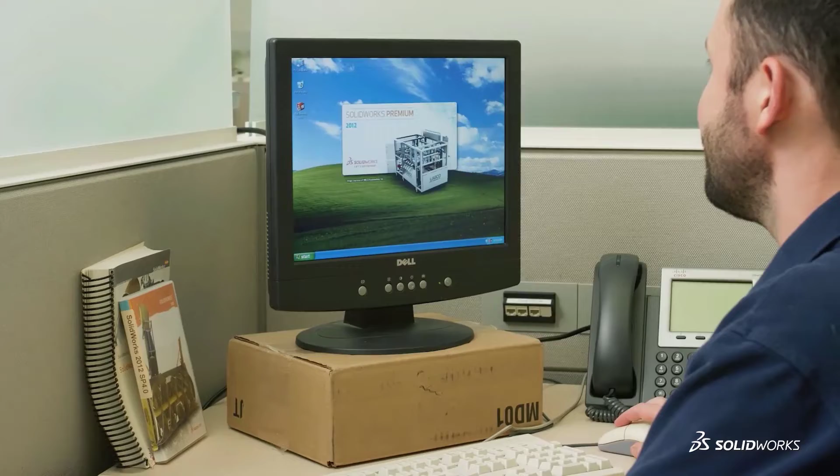So much has changed over the last 10 years, hasn't it? Over the last 10 years, what changes have you experienced? I bet the ways you connect to your job and accomplish your work are most certainly different.

Progress must be part of your purpose. To make great design successful, you must also master the business of product innovation. Where we used to think of CAD data as the main source of truth, actually product development information is all around us, in every conversation, idea, interaction.

Welcome to 3D Experience World 2021. As smoothly as your team works together, what about your extended value network? Let me invite William and Charles from Square aboard.

What made you pick 3D Experience platform? We really needed a mechanism to store and organize revision-controlled CAD data in the cloud. And so we looked to 3D Experience to do that.

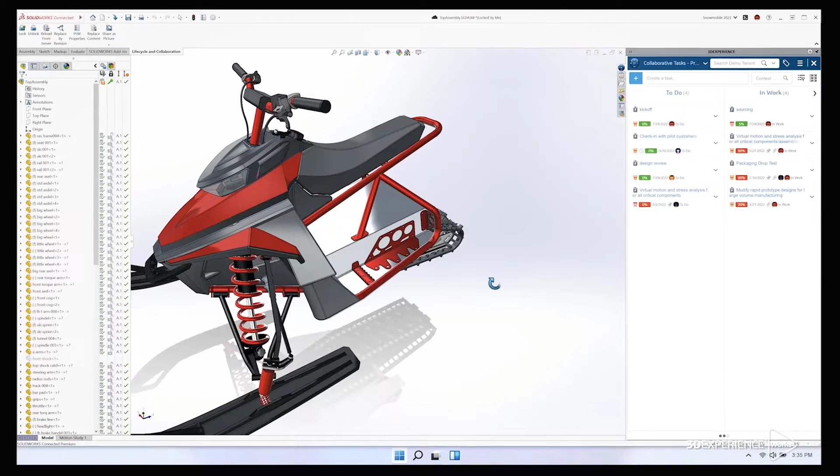For 2023, the SOLIDWORKS R&D team, as usual, has delivered an amazing lineup of enhancements to help you work smarter, faster, and together. Not just together as a team, but also connected to your data and your tools.

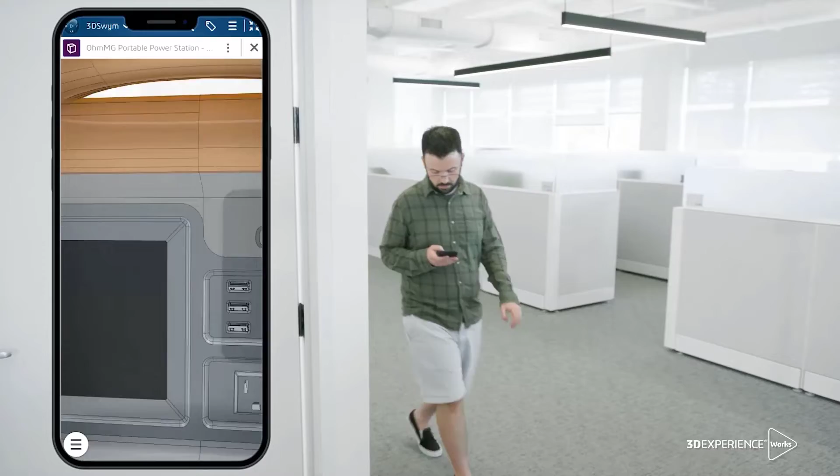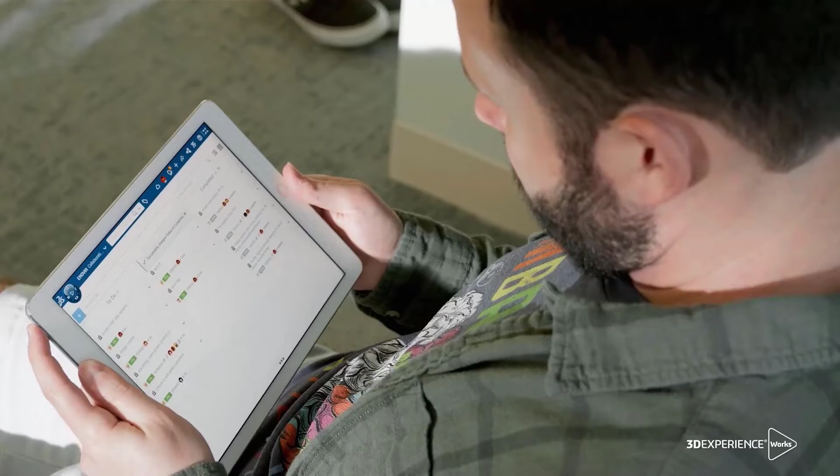In 2023, we will improve your productivity and optimize your CAD potential. But to truly accelerate your innovation, you need to make all product information available for your entire enterprise to access and act on real time throughout the day, wherever they are.

As you look to 2023, how will you continue to improve your productivity and expand creativity? How will you inspire those around you?

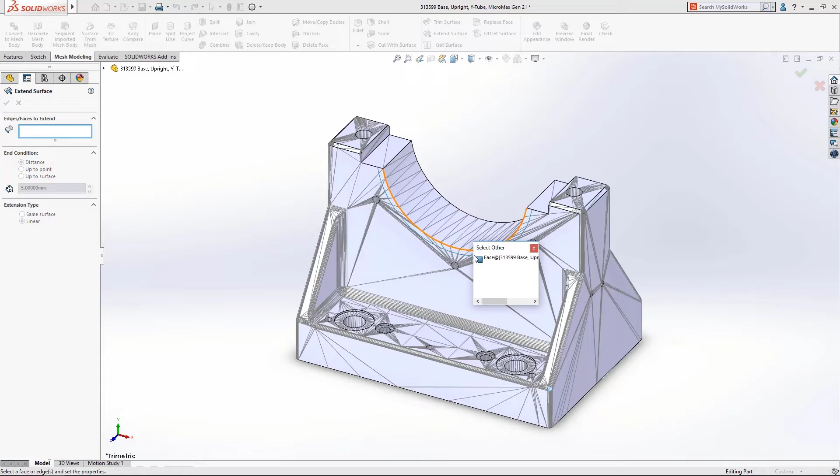SOLIDWORKS 2020 now supports more advanced editing tools, which will make it easy to increase the radius of this surface. We'll start by offsetting the mesh surface and extending the result. SOLIDWORKS 2020 now supports mutual trim operations, as well as knit surfaces, making this change a breeze.

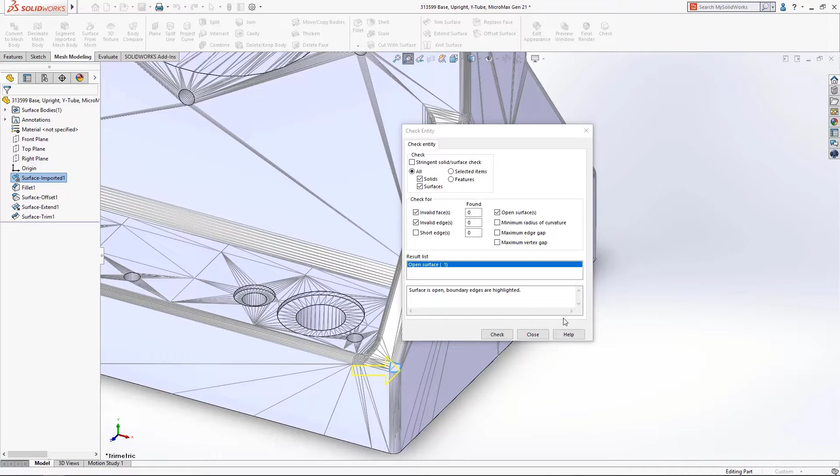It's not uncommon for STL files to be damaged. Running a quick geometry check shows that there's an open surface. With SOLIDWORKS 2020, you can now delete these holes by right-clicking and choosing Delete Hole from the context menu, or by simply selecting the edge and pressing Delete.

SOLIDWORKS 2019 introduced Delete Face. SOLIDWORKS 2020 expands the capability to support Delete and Fill, which makes removing these features on the part a trivial operation. SOLIDWORKS 2020 gives you powerful tools that makes editing mesh geometry familiar and easy.

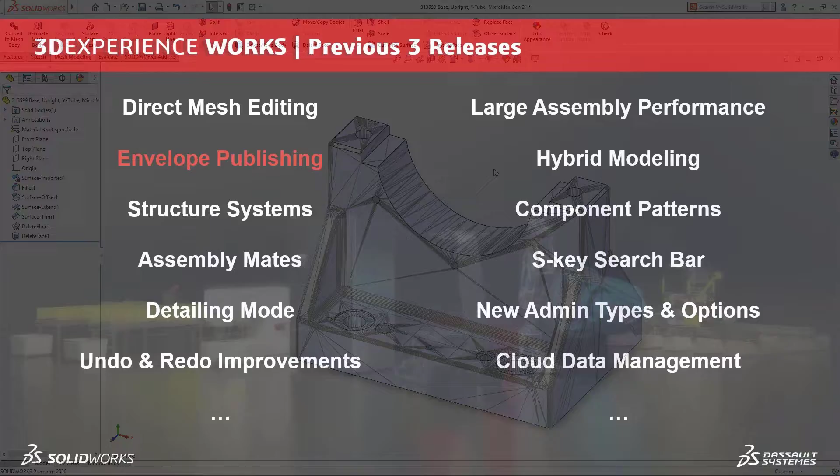Next, let's look at envelope publishing. Working on complex assemblies like the OMAX Micromax Waterjet with multiple systems and designers can be a challenge, especially when work needs to reference other subassemblies. Previous workflows would either have work done at the top-level assembly or by creating duplicate parts in subassemblies. These added significant time and could be difficult to manage.

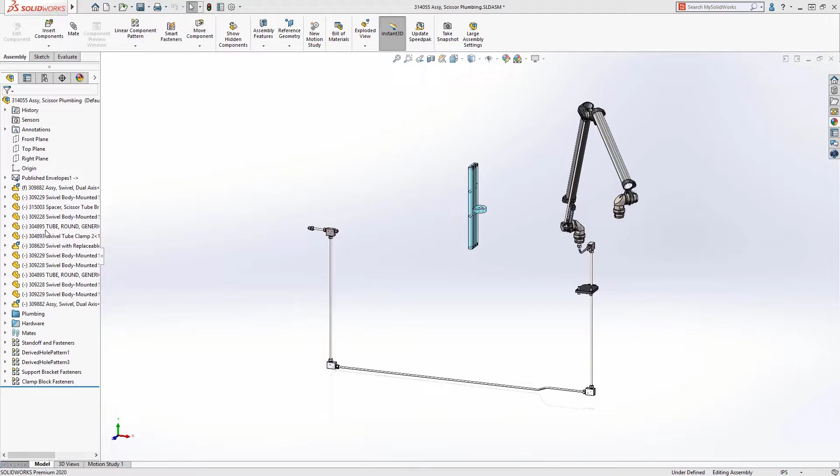Envelopes have long been a great tool for making reference components that do not affect calculations or bills of materials. With the new envelope publisher in SOLIDWORKS 2020, envelopes are no longer limited to components in the same assembly. Now, we can simply select the components needed for reference and a destination assembly.

Once the envelope is created, we can open this same destination assembly to complete the task. Now it is easy to finish all the plumbing design work in one place. We can add reference geometry or mate directly to the envelope components, ensuring the design will fit in the top-level assembly. Envelope Publisher makes it simple to work collaboratively in large assemblies and be assured design work will fit together seamlessly.

Next, let's look at a revolutionary way of weldment design: Structure Systems. Structure System was introduced in SOLIDWORKS 2019 and provides a more flexible method to create welded structures with or without the use of complex 3D sketches to define all the members.

Let's review some of the capabilities of Structure System and take a look at several of the enhancements for SOLIDWORKS 2020. In this example, the weldment will be defined with just a couple of sketches, an axis, and 4 planes.

Primary members can be created in a variety of ways, but now in SOLIDWORKS 2020, the point and length member definition has new options. Members can now be created between pairs of sketch points or chained together to create a series of members along a chain of points.

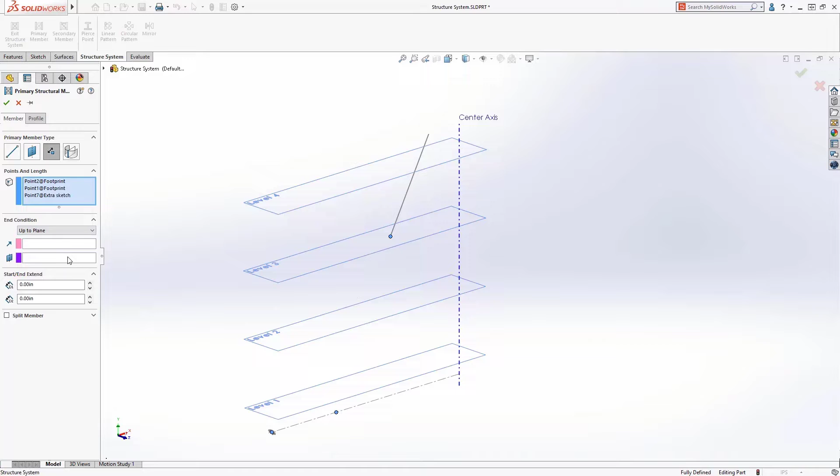The new Up to Point option allows you to create members that all converge at a single reference point. And the new Up to Plane option creates members that terminate at a selected plane. The member extrudes in the direction of the reference plane, or you can choose a sketch segment as the direction.

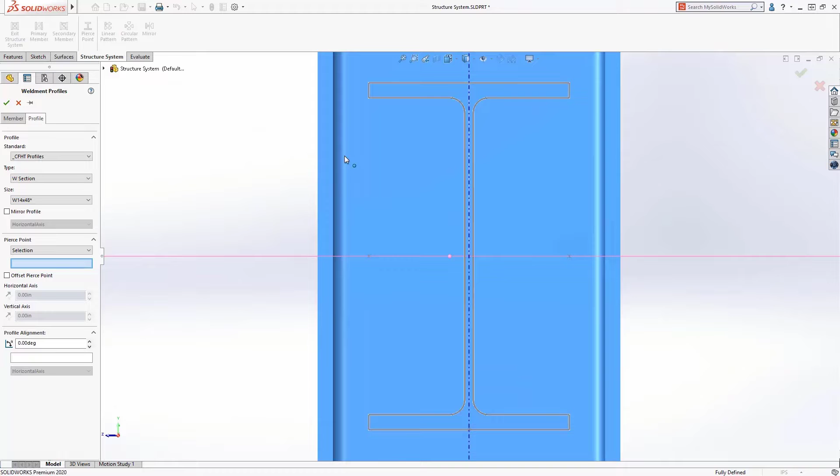As introduced in SOLIDWORKS 2019, secondary members can be added using support planes, and for these, a different weldment profile will be used. The top of these members needs to align with the selected planes, and to accomplish this, an alternate pierce point can be selected. Another secondary cross member can be added using the Between Points method, and will define this member to go between the corners.

In SOLIDWORKS 2020, primary and secondary members can now be split during creation. Splitting can be done using dimensions, instance count, or by selecting a reference such as a face, plane, or structural member. And for this member, we'll rotate the profile by 90 degrees.

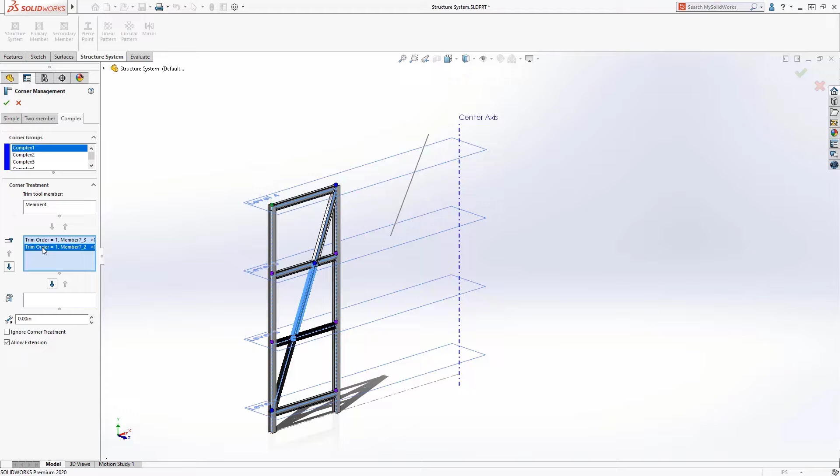When you're finished defining this structure system, the corner management tool kicks in and allows you to define the corner trims. For the simple corners, we'll define a planar trim with full contact to the intersecting member. For the complex corners, SOLIDWORKS does a fantastic job of determining the trim tool as well as the trim order for the intersecting members. Hiding the vertical member, you can see what a great job SOLIDWORKS did on the corner management.

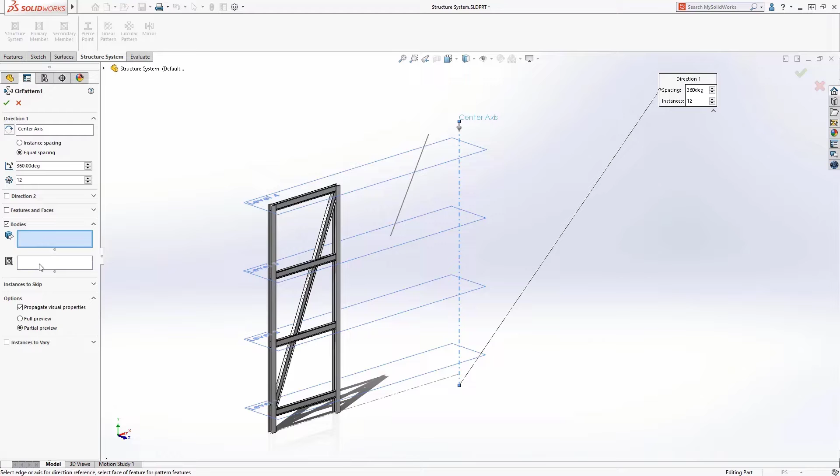To create the circular structure shown in the beginning of this demonstration, we need to pattern this structure system. Previously, bodies could be patterned to achieve this, but now in SOLIDWORKS 2020, you can create linear and circular patterns or mirror the entire structure system. By patterning the structure system, you are maintaining the intelligence of each of the members, and additional structure systems can be added referencing the patterned members.

In this example, we'll add a new structure system to define the perimeter members. These are added using the support plane method between the original structure system and the pattern members, and the pierce point will be defined to align to the planes.

Upon exit of this structure system, the corner management tool determines the corners between the new members and the first structure system and its pattern members, and determines the proper trim tool member and trim order. This perimeter structure can also be patterned to complete the design.

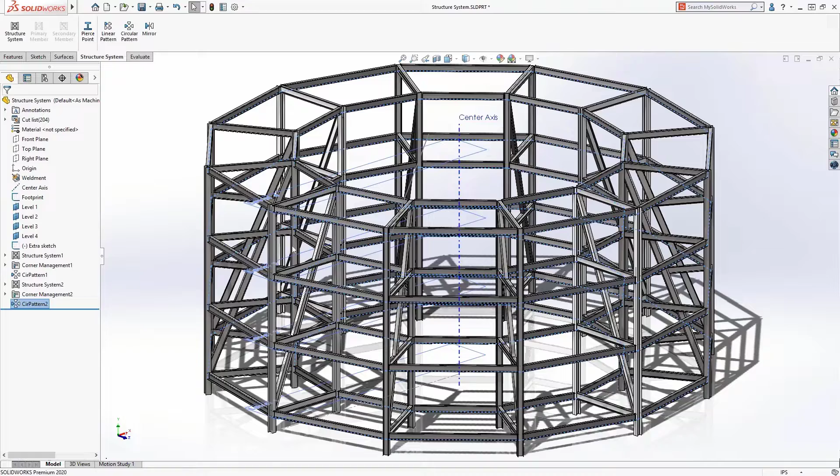The structure system feature, introduced in SOLIDWORKS 2019 and enhanced in 2020, provides an advanced weldment environment that lets you create and modify structural members of different profiles in a single feature with flexible corner management and trimming.

Fourth on our list is Enhancements to Assembly Mates. The Quick Mates toolbar, introduced in SOLIDWORKS 2014, provides a means to rapidly assemble components directly from the graphics area. SOLIDWORKS 2020 extends this popular tool by adding additional commonly used mates.

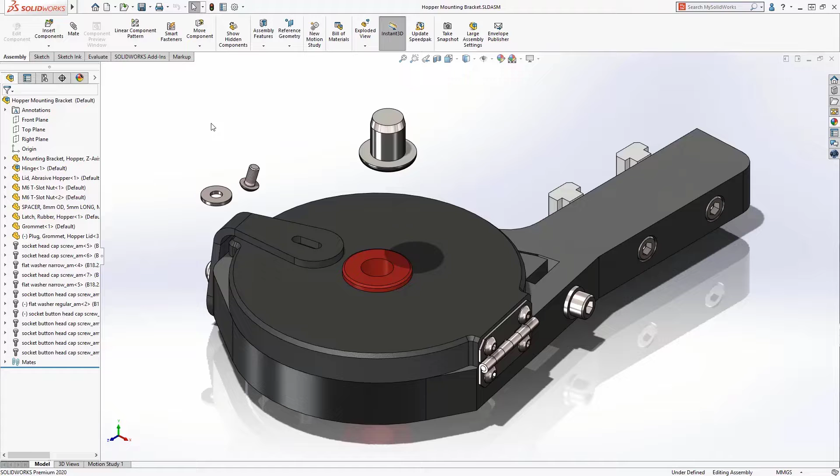Let's take a look. When mating the washer to the slot, the Quick Mates toolbar now includes the slot mate and provides options for choosing its constraint. For this case, we'll center it in the slot.

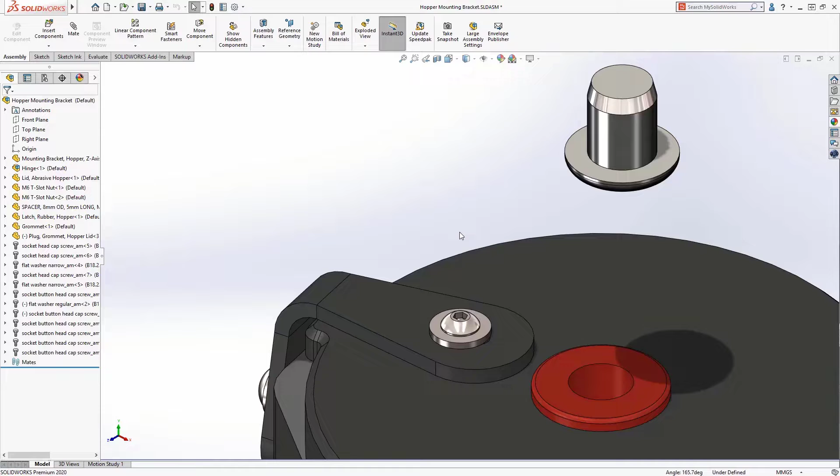The screw needs to be mated to the washer, and we've long had the ability to do this with the Profile Center Mate from the Quick Mates toolbar. But there was no way to flip the mate alignment without editing the mate after creating it. Now, in SOLIDWORKS 2020, a new Flip Alignment button pops up, allowing you to flip the mate on creation.

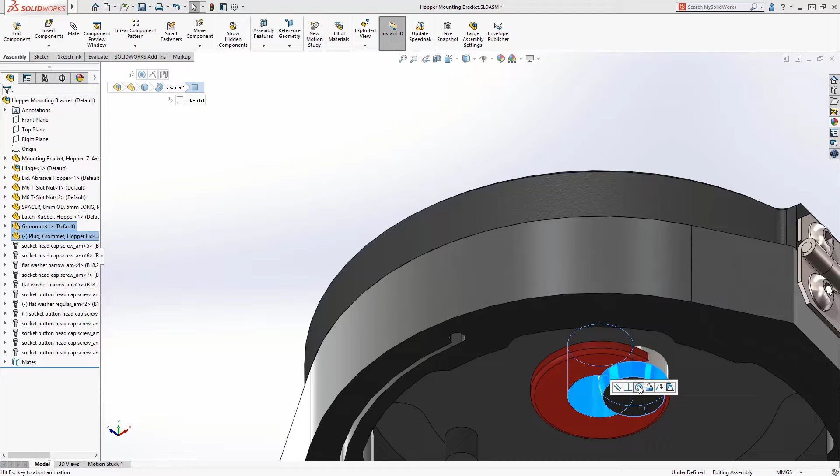Just as with the slot mate, the constraint options are available for the width mate to establish its position. Previously, there was no way to flip the alignment of a width mate. Users had to suppress the mate, rotate the part, and then unsuppress the mate. The new Flip Alignment button pops up, allowing alignment changes on the fly.

In addition, when editing a width mate, the option to flip mate alignment is now available on the right mouse menu as well as in the Property Manager. Limit mates have also been added to the Quick Mates toolbar. Both the limit distance and limit angle mates are now available to quickly position components in the assembly. The angle, maximum, and minimum values can be entered immediately to keep your focus directly on the screen.

With the new mate types available on the ever-popular Quick Mates toolbar, SOLIDWORKS 2020 continues to provide users with tools to rapidly assemble components. How about this one? A big favorite of many designers, Detailing Mode.

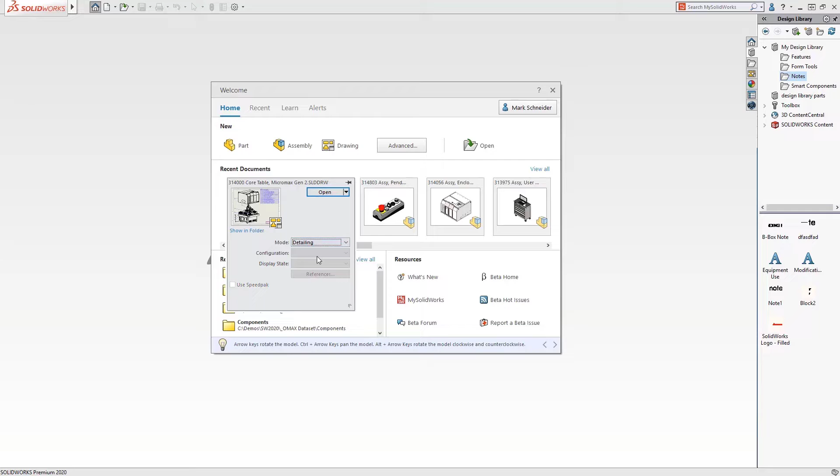Performance is always a major focus for the SOLIDWORKS development team, and this year is no different. With Detailing Mode in SOLIDWORKS 2020, you can now open massive drawings in seconds, regardless of their size and complexity. The model does not get loaded, but the drawing views are intact, so there's no loss of detail.

Detailing Mode is perfect for opening drawings for minor edits or design reviews. Individual sheets load in an instant, and the drawing can also be printed. But it doesn't stop there. Some editing capabilities are available as well, such as making changes to annotations or dimensions.

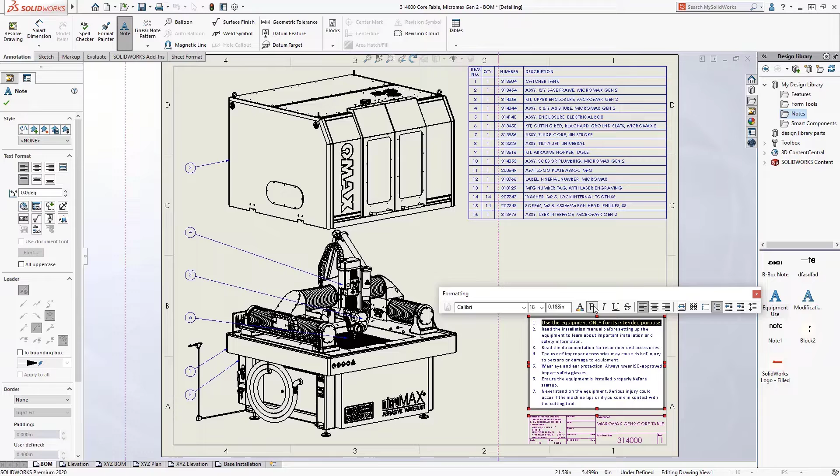Notes can be added to the drawing or dragged from a library of company notes, and annotations added in Detailing Mode can also be edited. This drawing sheet is a bit crowded, and as with a resolved drawing, drawing views can be moved and arranged on the drawing. Dimensions can also be positioned to achieve the desired layout.

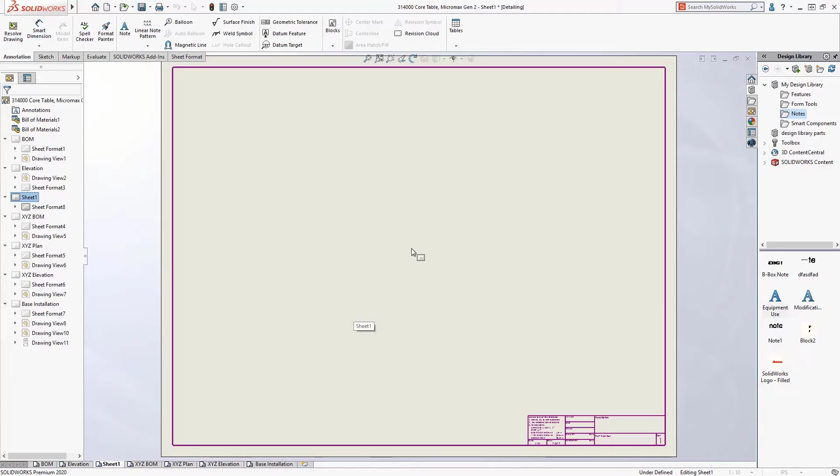Views can also be cut, copied, and pasted. And to better organize this drawing, we'll add a new sheet, reposition the tab, paste the view onto the sheet, and do some dimension cleanup.

Balloons can be added or repositioned to take advantage of magnetic lines for a clean look. If additional dimensioning is required, this can be done in Detailing Mode as well. Dimensions can be added to edges and vertices using the same techniques you're familiar with in resolved drawings.

In this case, we'll add some dimensions to locate the positioning holes for the gantry system. We'll also define the hole size, and you can see that the dimension palette is available to fine-tune your dimension with notes and tolerances, or the Dimension Property Manager can be used for more refinement.

Any command that is not grayed out on the Command Manager is available in Detailing Mode, such as the Format Painter. Here we'll leverage an existing dimension and paint its format onto our new dimensions. Revision tables, symbols, and clouds can also be added to communicate any changes.

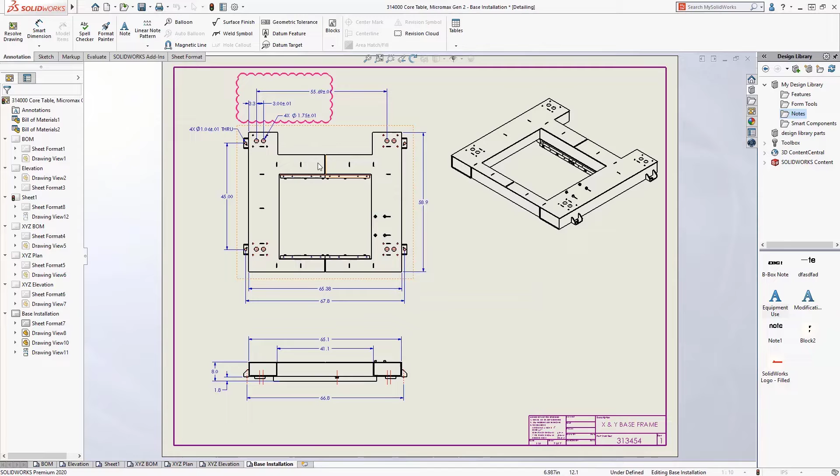And when you're done with your edits, the drawing can be saved, and rest assured that these edits will be there regardless of which mode the drawing is opened with next. To communicate with external collaborators, you can print the drawing, or you can save the drawing in a variety of formats such as DWG, JPEG, or even PDF.

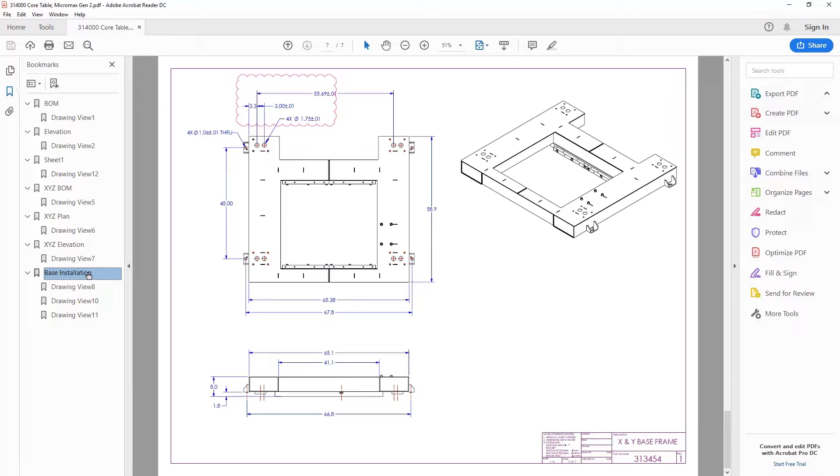With Detailing Mode in SOLIDWORKS 2020, productivity is enhanced by allowing users to open in seconds drawings containing large assemblies, lots of sheets, many configurations, or resource-intensive views.

A short but very useful enhancement is the redo ability of SOLIDWORKS. Making a mistake is easy to correct using undo. Now with SOLIDWORKS 2020, redo is more complete, allowing you to redo feature edits. This means that if you accidentally undo a feature, you won't have to spend extra time recreating it.

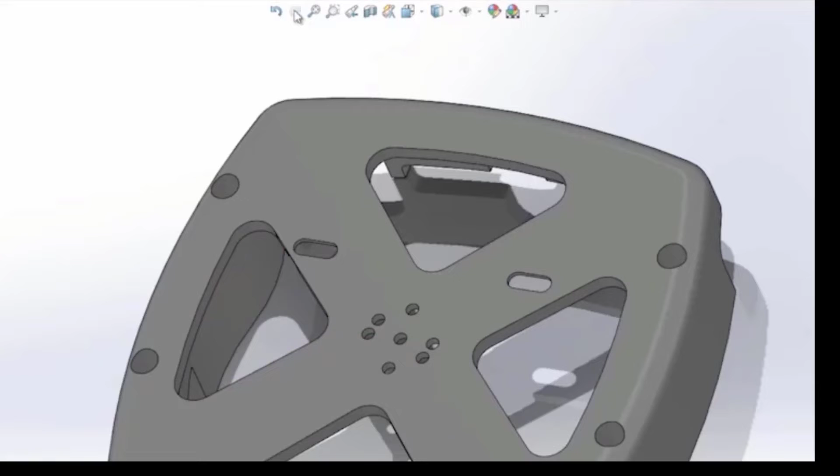We continue with a big one, large assembly performance. Graphics performance, introduced in SOLIDWORKS 2019, fundamentally changed how graphics are handled by SOLIDWORKS and your certified graphics card, providing significantly higher frame rates and much smoother response when interacting with large assemblies. This system option, found under the performance settings, is now enabled by default in SOLIDWORKS 2021.

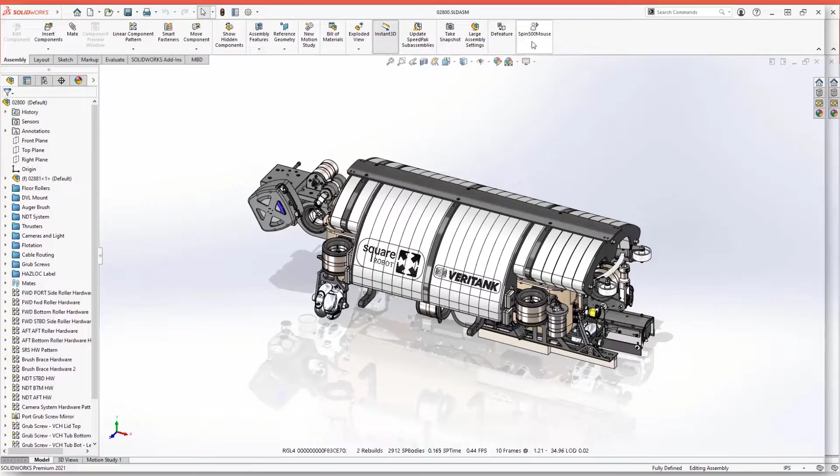To see the difference, we will compare this setting enabled and disabled side by side, running a macro that performs 500 mouse rotations for consistency. It's clear that graphics performance is significantly faster, but the numbers tell the real story. These actions took only 7.94 seconds and ran an average of 63 frames per second with graphics performance enabled.

Meanwhile, with this setting disabled, these actions took 161.72 seconds at an average of only 3 frames per second. If you haven't enabled graphics performance yet in SOLIDWORKS, you're sure to notice immediate gains when using certified graphics cards.

And new for SOLIDWORKS 2021, there are 2 new enhancements that make graphics performance even faster. The first is when working in hidden lines removed and hidden lines visible. Calculating silhouette edges is a complex task graphically that was previously handled by the CPU. New in SOLIDWORKS 2021, all of these calculations are now handled by your graphics card.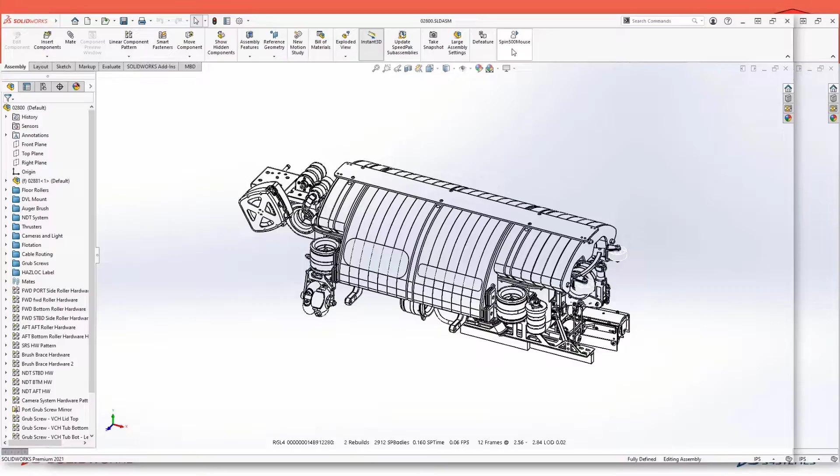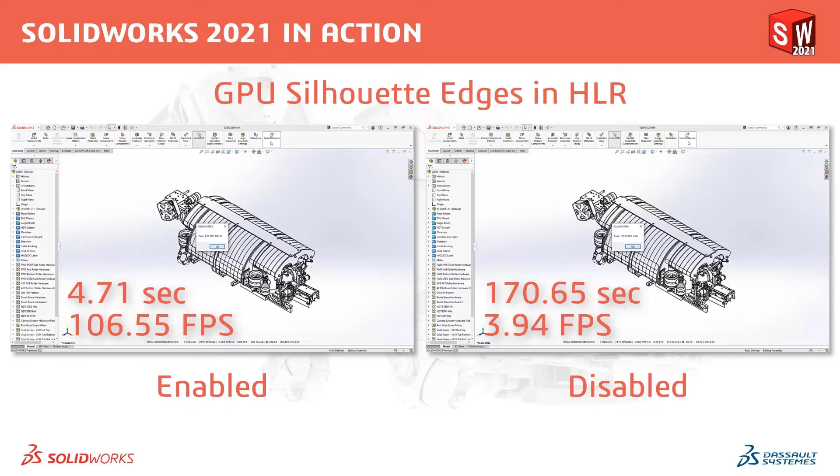In the case of the assembly from Square Robot, there are a lot of silhouette edges to calculate across the model, and like before, the difference is clearly apparent. With GPU silhouette edges, the macro ran in only 4.71 seconds at an average of 107 frames per second, while with this disabled, it took 170.65 seconds and only averaged 3.94 frames per second.

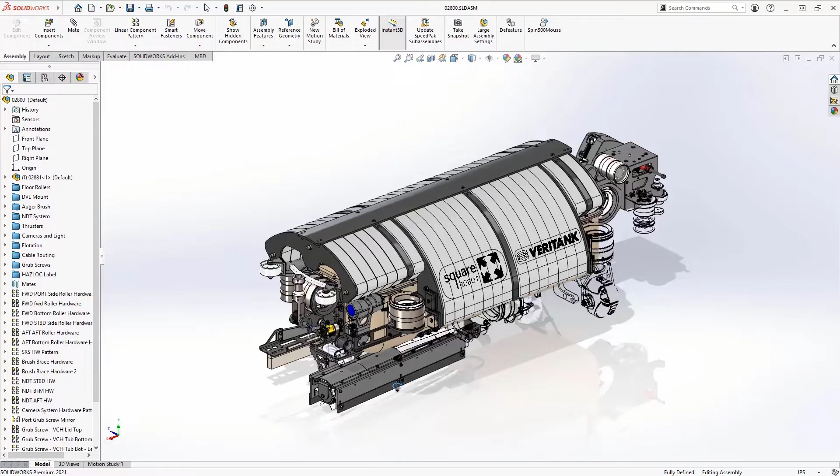The second new enhancement is the addition of occlusion culling technology to graphics performance. Occlusion culling is when it is determined that a model is out of view and doesn't need to be rendered. With a special development build, the occlusion culling has been paused as this model is rotated. You can see that several of the components that were previously out of view were never rendered by the graphics card.

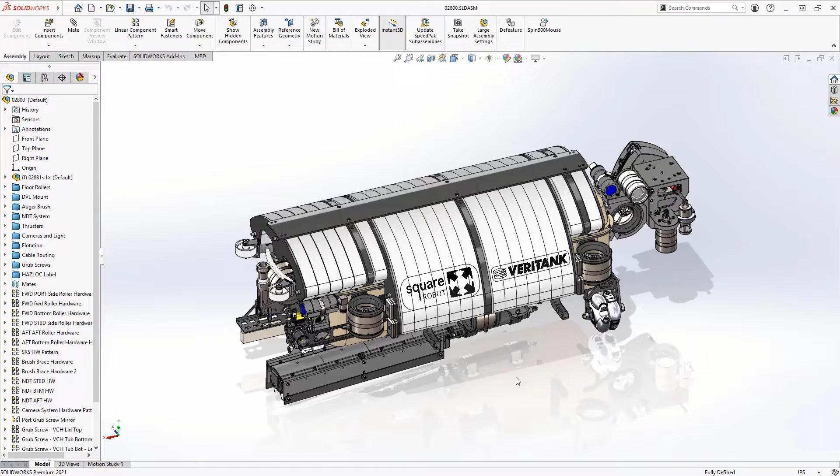Occlusion culling has a much more significant impact on performance the more components are rendered by the graphics card. In this assembly, the gains may be marginal, but in much larger assemblies, the gains are much more impactful. Graphics performance in SOLIDWORKS 2021 continues to take advantage of your certified graphics card, delivering a smoother and faster experience with complex and large assemblies.

Let's move on to hybrid modeling. Designers demand the ability to create manufacturable products using an ever-increasing variety of file formats. SOLIDWORKS 2022 makes this easier than ever with new enhancements for mesh BREP formats and tools that help you view and edit critical product information.

This ball valve, equipped with a lockout-tagout feature, is perfect for this control panel, but the handle is too plain to be incorporated in a luxury product like the Nemo. The supplier provided their files in mesh BREP format. In SOLIDWORKS 2022, working with these files is just like working with native geometry, thanks to the new hybrid modeling capabilities. Creating features like chamfers, extrudes, reference planes, and more no longer require intermediate bodies and Boolean operations.

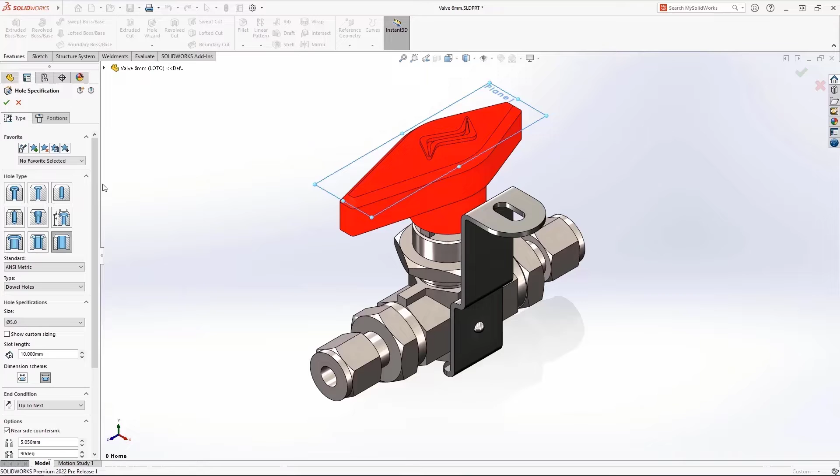The handle needs a slot for a lock. Now in SOLIDWORKS 2022, HoleWizard's slot length can be defined by arc tangents or centers. Also, when positioning the slot, the Tab key toggles between vertical and horizontal orientation.

Manufacturing this handle will require draft. Bidirectional parting line draft would be the most appealing. In SOLIDWORKS 2022, you can now create draft in both directions when using a parting line, rather than having to create two separate draft features.

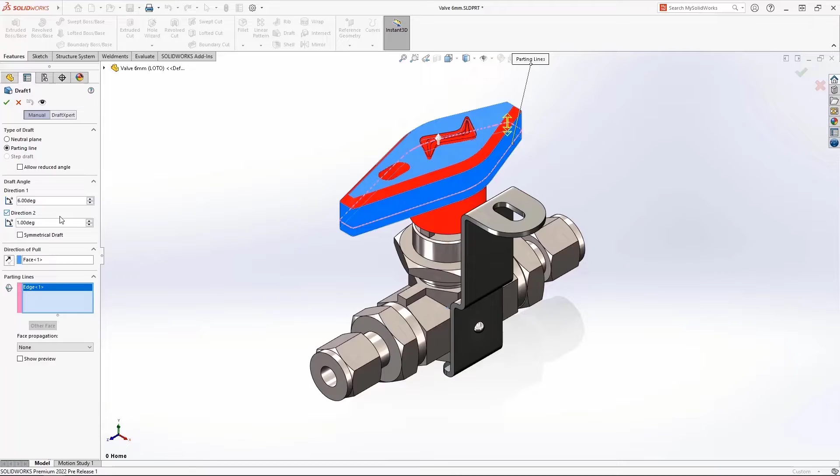Let's come back to assemblies with component patterns. The intelligent pattern-driven component patterns get even smarter in SOLIDWORKS 2022. When you choose a component to pattern, SOLIDWORKS will always choose that component's location as the seed for determining how to create and position the other instances.

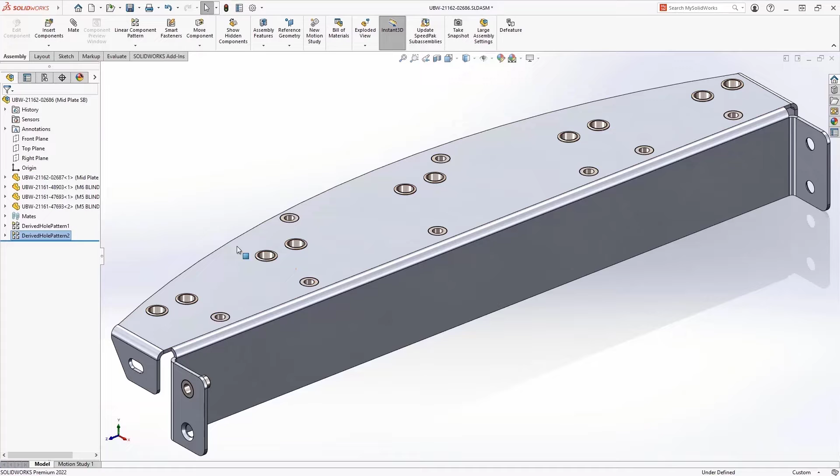Even if you change the location of the component to a different location, the pattern still assumes that the component you are patterning is in the seed position. This means it's much easier to take advantage of existing patterns and hole wizard features to quickly position multiple instances of components, such as hardware, and rapidly populate your assemblies.

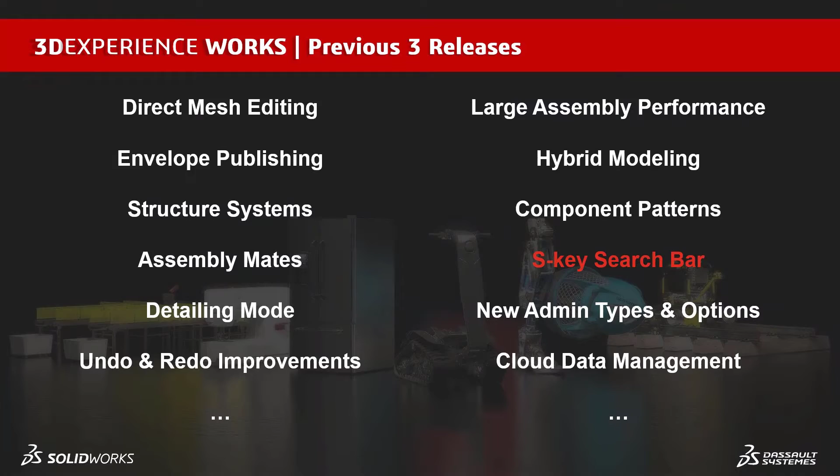Our beloved S-key has had an enhancement of its own. In SOLIDWORKS 2022, Command Search is integrated into the S-key shortcut menu. You can even have SOLIDWORKS show you its location for future reference.

For those of us who upgrade lots of users every year, the new admin types and options are definitely a great help. Administrative images create tailor-made installation packages from the source SOLIDWORKS installation files. SOLIDWORKS 2022 brings exciting new enhancements to this process that make deployments more powerful, flexible, and organized.

SOLIDWORKS 2022 offers two new options for deploying administrative images: Remote Client and Compressed. The Remote Client administrative image type was created specifically for remote users. It automatically downloads the bulk of the installation files from SOLIDWORKS servers instead of your company VPN. The compressed administrative image contains all of the same components of the standard image, but in a reduced size, which allows for easier sharing.

Staying organized is key to a successful deployment scheme. SOLIDWORKS 2022 allows you to create multiple nested groups that reflect your company's preferred hierarchy. Drag and drop makes rearranging items easy and convenient. Each subgroup inherits the setting to the parent groups. This makes editing the administrative image simple and reduces the user XML file size, making deployments even faster.

In this example, most users won't need these packages to be installed, so we uncheck them in the global settings. However, our users will need access to the SOLIDWORKS PDM server. And now in SOLIDWORKS 2022, we can even create a vault view after installation. No need to run any extra custom scripts.

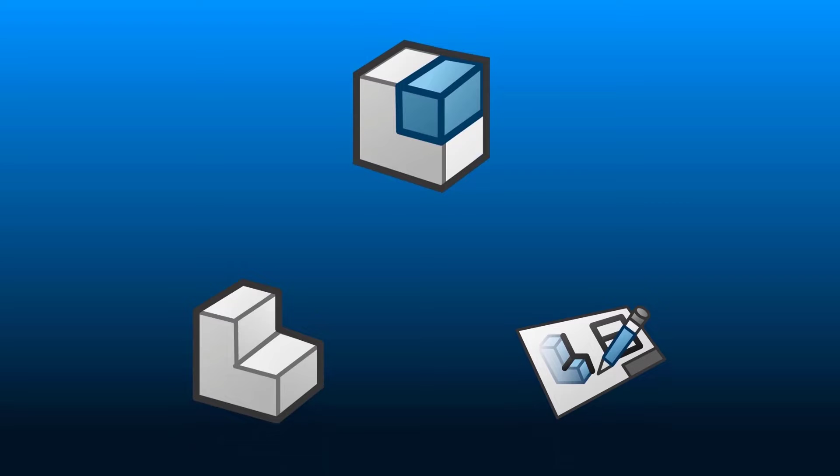Whether you work in a large organization or just a small team, no doubt you're concerned with storing, managing, and collaborating on your design data. And it's tricky, because SOLIDWORKS parts, assemblies, drawings, and other supporting documents are all linked. Consumer cloud storage apps don't know how to handle that. Maybe the investment in SOLIDWORKS PDM and Manage isn't right for you.

There is another way. When you connect SOLIDWORKS to the 3DEXPERIENCE platform, cloud data management is just a few clicks away. Eric Engineer and Debbie Designer are part of the team working on the Nemo submersible. They are on a tight deadline to finish up the hatch design.

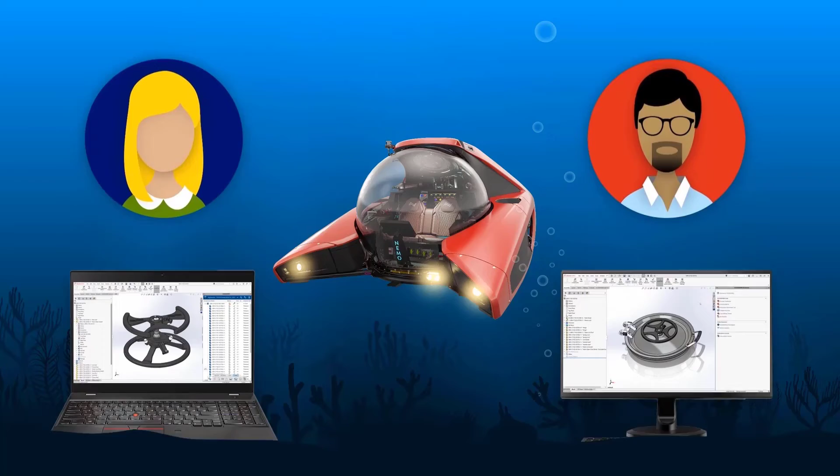Eric puts the finishing touches on the latch mount by inserting fasteners from SOLIDWORKS Toolbox. A quick check on the assembly drawing and everything is up to date and ready to save to the cloud.

First, he logs into the 3DEXPERIENCE platform. It's his team's secure connection to the cloud. Right from the task pane, he sees the status of his work. These indicators show which components need to be saved.

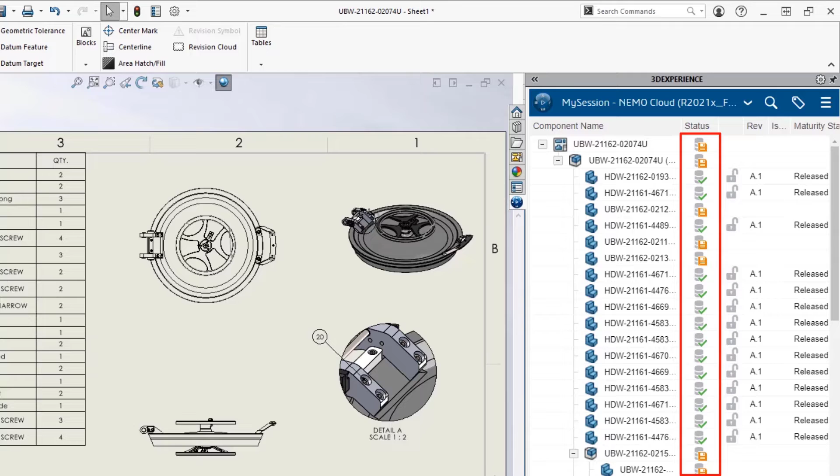As for the hardware and other standard parts, SOLIDWORKS is configured to automatically catalog and release these items so all users can access their shared libraries online.

The Save dialog shows exactly which items require an update. He can also assign any item to a bookmark, such as related drawing files. Out of a long list of components like this, bookmarks are a convenient way to flag them for easy access.

Only the new or changed items need to be uploaded to the cloud. This makes efficient use of network bandwidth, but still ensures everything is up to date.

As the leader of his team, Eric is able to release his own designs. Easy-to-use lifecycle operations like this help the team avoid accidental overwrites.

Switching over to his Bookmarks tab, he sets the related part and assembly drawings to Released. It's just 2 drawings for now, but as the detailing work continues, the bookmark will keep everything organized for quick access.

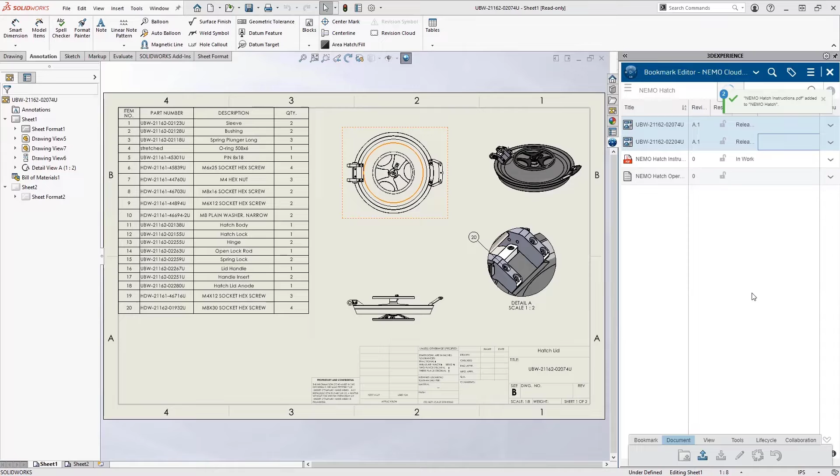That includes any other supporting documents, like this PDF instruction sheet and the related SOLIDWORKS Composer file. Most document types can be previewed interactively within the SOLIDWORKS task pane. No need to launch external viewing apps.

Eric has a backlog of finished designs that also need uploaded to the cloud. He can automate this with a batch save. He just selects his local design folders and assigns them to the appropriate cloud space. SOLIDWORKS takes care of the rest.

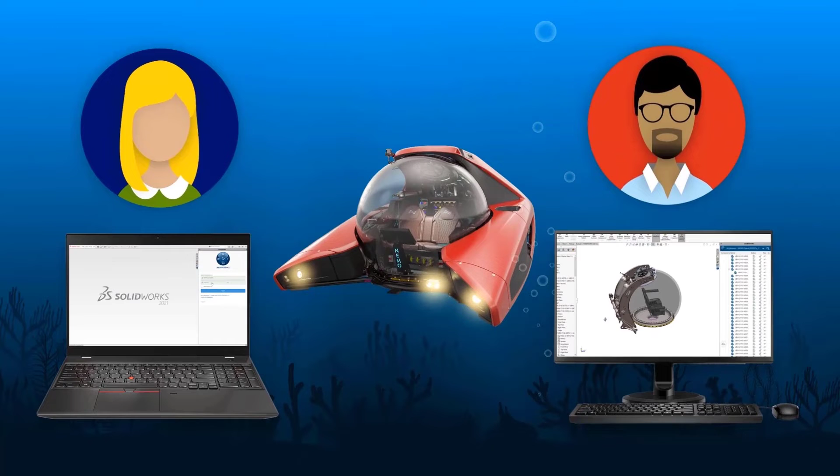As the Nemo sub-design evolves, the team must respond to change orders quickly. Debbie logs into her session and sees a message from Eric requesting a change. A quick keyword search shows several results. This one looks right.

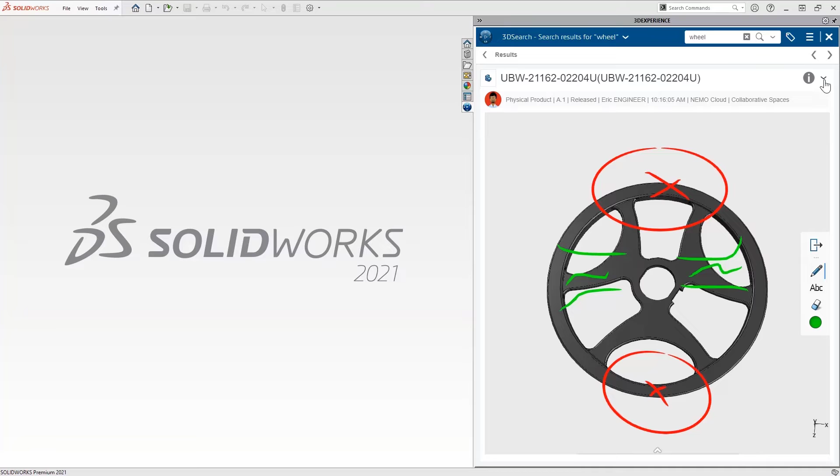Debbie uses the 3D annotation tools to quickly sketch out a couple ideas. From here, she opens the part in SOLIDWORKS. The latest version is automatically retrieved from the cloud.

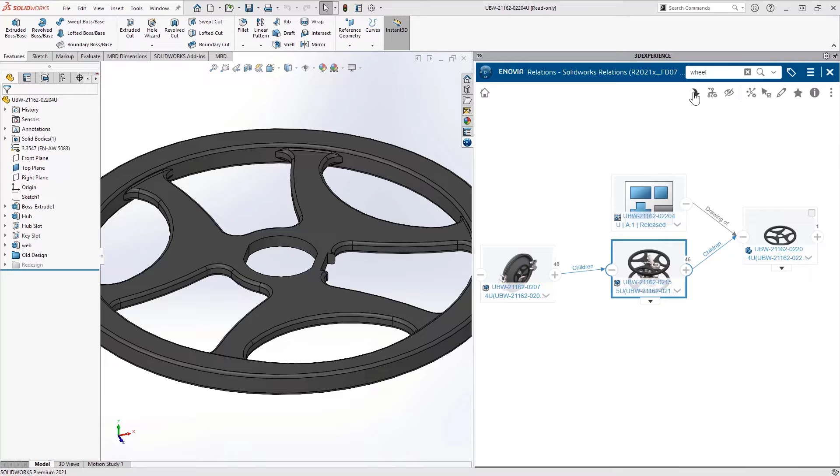Before she makes any changes, it's best to do a where used search. The hand wheel is used in one subassembly below the master hatch assembly. She can open that right into her modeling session and get to work.

This version of the subassembly is released. In order to make changes, Debbie needs to create a revision of the assembly and the hand wheel. The status indicators immediately show that the current assembly structure is out of date.

So she replaces it with the new revisions and sets them to reserved. This gives her write access to the items she needs to modify without locking other users out of the rest of the assembly.

The redesigned hand wheel looks great, but she needs to update the drawing. The shared bookmarks give Debbie quick access to the related drawing files.

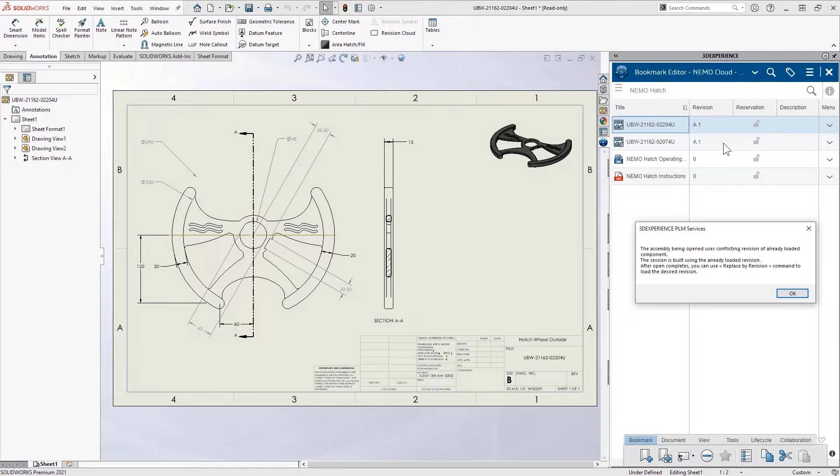The drawing is now in sync with the part model, so she saves it to Revision B, then sets the part and drawing to a frozen state so they can be reviewed.

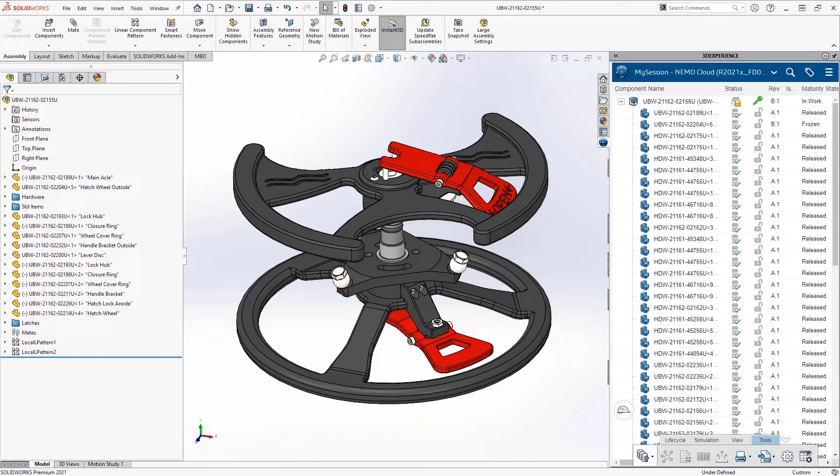Returning to the assembly, she finishes out the design by adding the latch mechanisms and saves the new revision back to the cloud.

In order to meet their tight deadline, the Nemo team often needs to work on the same design files at the same time. Eric is working on a new revision of the master hatch assembly.

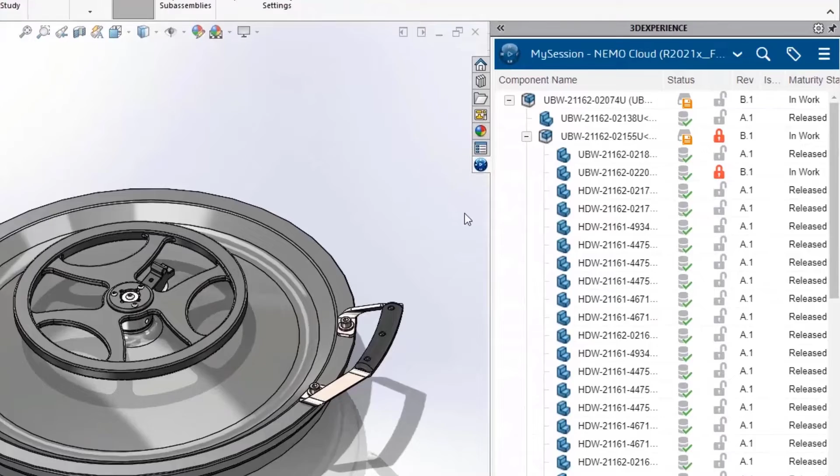These icons let him know Debbie has the hand wheel assembly reserved and is currently making changes. He can reserve the top-level assembly without affecting Debbie's work on the subassembly. This modular approach to access control allows users to design concurrently without accidentally saving over each other's progress.

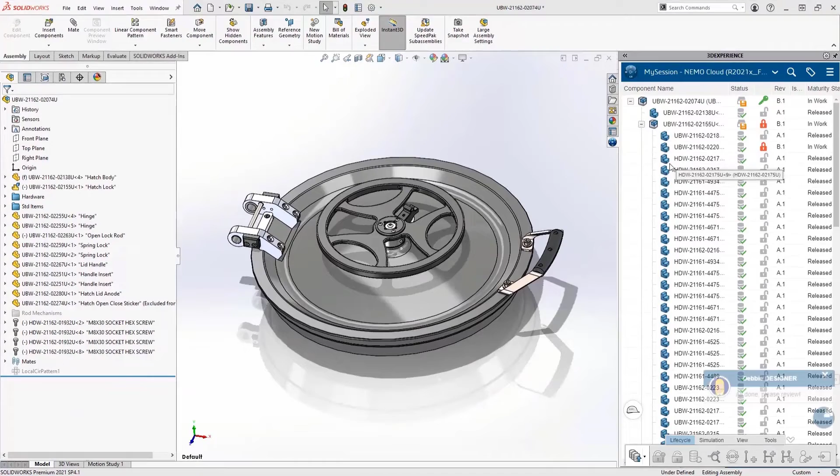A short time later, Eric sees that Debbie has finished up. He just needs to reload the latest version of the subassembly from the server. Taking a look at the hand wheel drawing, he likes her redesign and moves it to Released.

Back in the assembly, Eric attaches the connecting rod mechanisms, then returns to his bookmarks to update the drawing. Bumping the assembly and drawing to Revision B, he's ready to save.

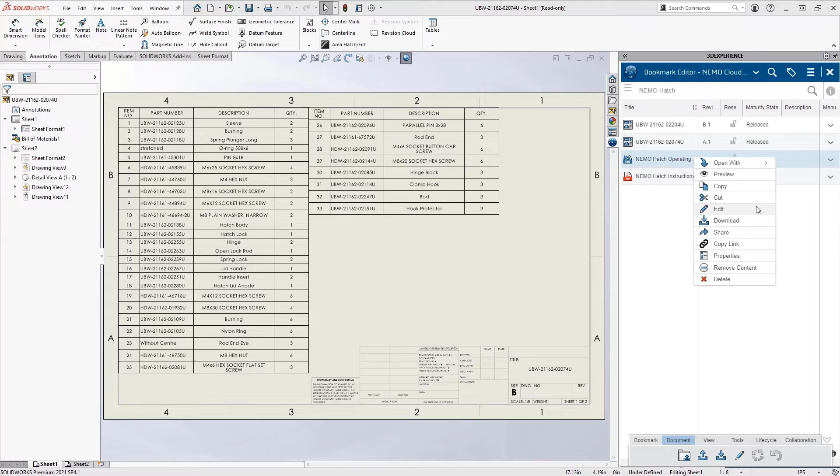The revised hatch assembly requires new versions of the supporting documents. From the convenience of his Bookmarks tab, Eric uploads the latest version of the Composer file and uses the interactive preview to inspect the latest revision.

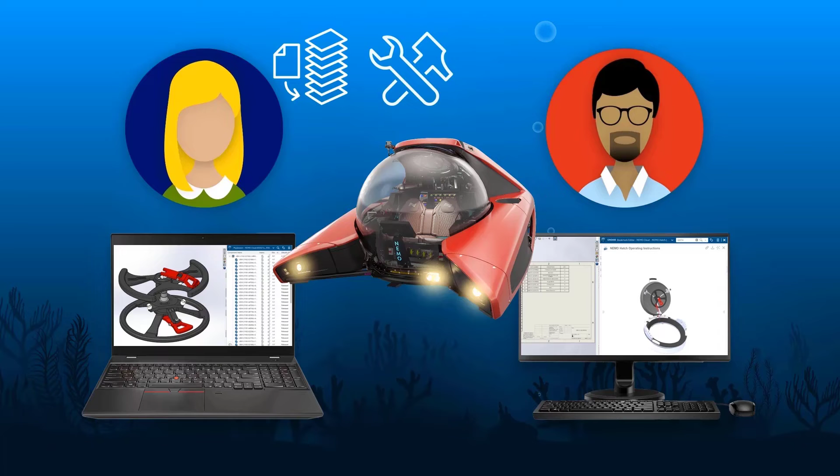Out-of-the-box cloud data management enabled the Nemo team to be productive right away. They were able to safely store their data, manage changes, and design concurrently, all without ever leaving their familiar SOLIDWORKS design environment. Everyone in the organization benefits when you connect SOLIDWORKS to the 3DEXPERIENCE platform.

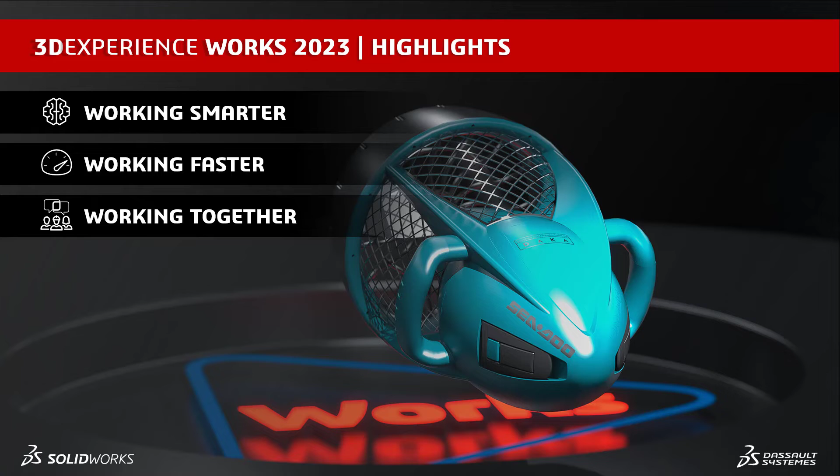Let's start with some highlights of what you will see later this morning. Working smarter, working faster, and working together are the three focus areas of this year's SOLIDWORKS enhancements.

So how do we work smarter? When it comes to large assembly performance, we can optimize resolved mode automatically. We can manually manage when to resolve lightweight components using the manually manage resolved and lightweight modes options. Automatically load components lightweight was renamed load components lightweight.

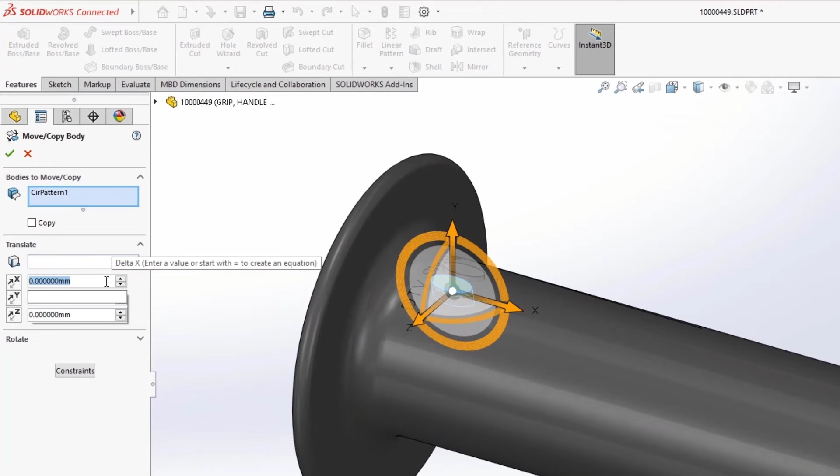We can now repair missing mate references or references to faces, edges, planes, axes, and points. This is done by automatically selecting a reference on the component that is in the same location and orientation to the missing reference. When we use the move copy body command, we can control the translate and rotate values with equations.

We can add these equations to a design table and control them there. We can double-click the dimensions in the graphics area and specify them using the modify dialog box.

When using structure systems, we can group similar corners, apply a corner trim to the group, and edit the groups as required. This will be a tremendous help to those of us using large weldment structures.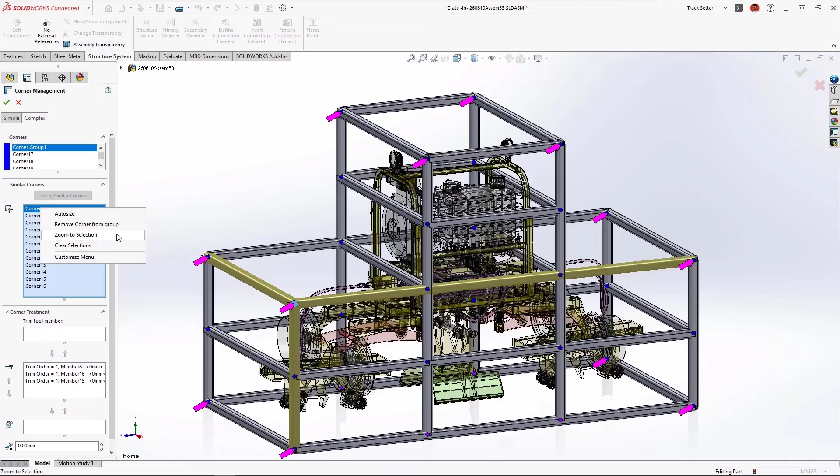We can see through transparent bodies with hidden lines removed and hidden lines visible, display states including components in assemblies and bodies in multi-body parts.

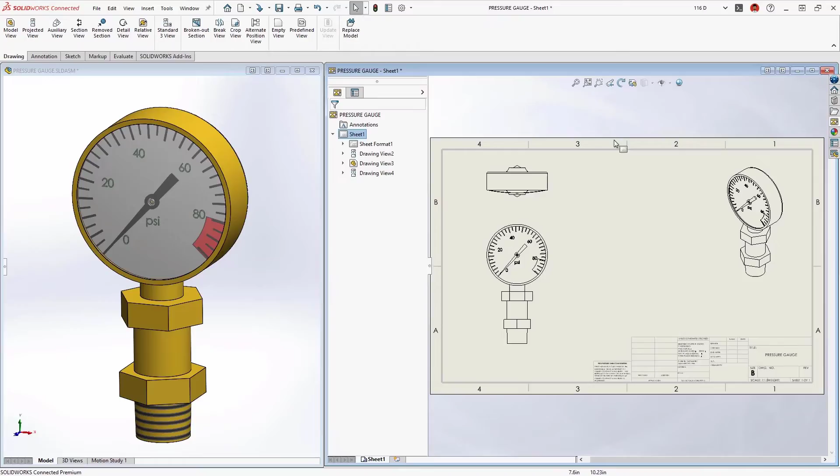What about working faster? More end conditions are available for cut features in assemblies. Toolbox components can be removed from the selection because the propagate feature to part option is enabled.

We can now create wrap features from sketches that use single-line fonts, also known as stick fonts, when we select Scribe to Wrap type in the Wrap Property Manager, where previously wrap features did not support single-line fonts.

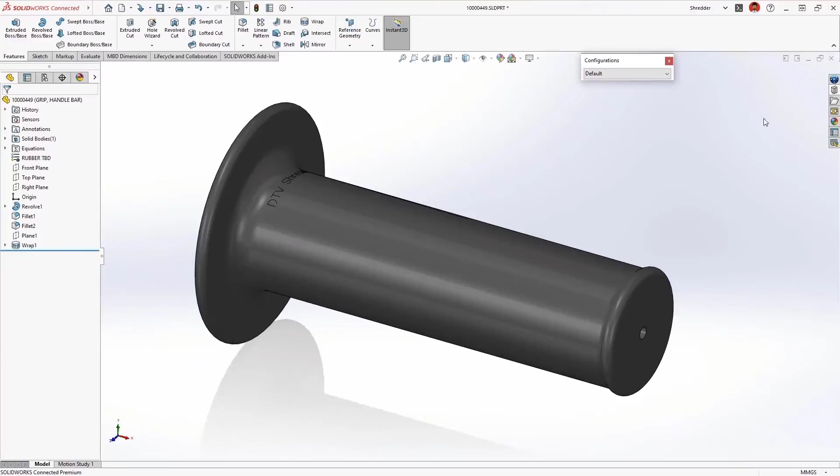Magnetic mates, a great aid to assembling anything modular, has received its own upgrades. We can suppress magnetic mates and connection points.

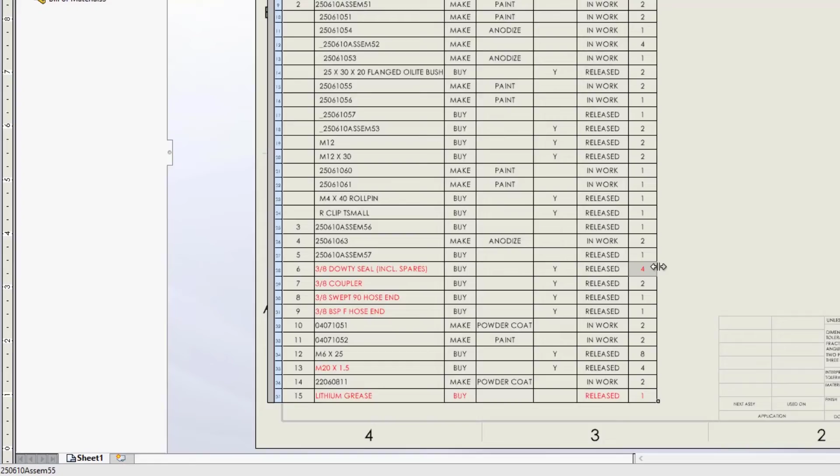In a bill of materials, when we change values manually, the text turns red. We can also change the highlight color, which is default as blue, when we override values using break-link. We can restore overridden values to their original value and prevent unwanted changes.

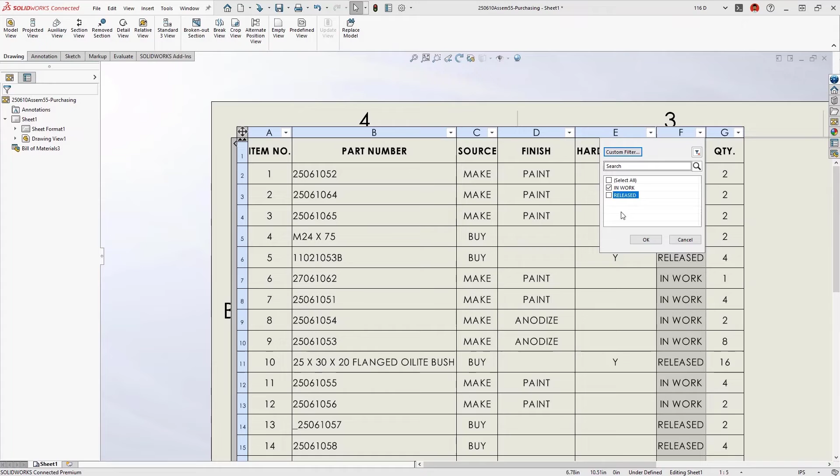Another bill of material enhancement, we can now filter a bill of materials so we can focus on what we need to see. We can filter a range of data based on our criteria.

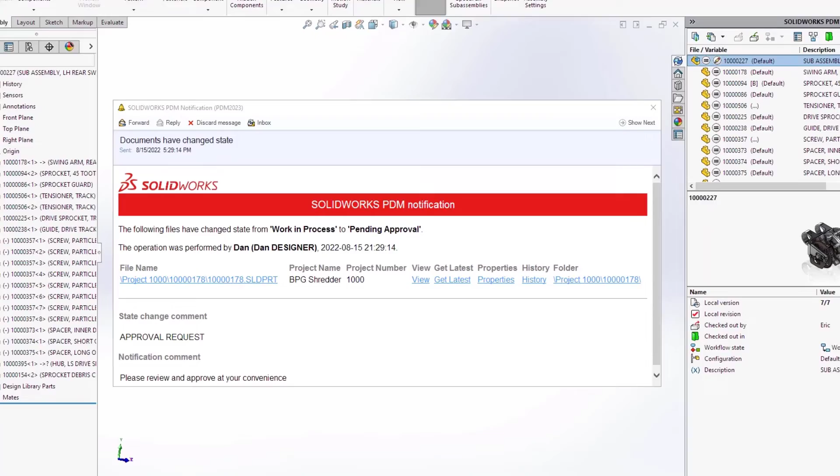Let's now look at a couple of improvements to help us work better together. SOLIDWORKS PDM lets administrators customize the templates for automatic notifications for a vault. This helps to display information that is more relevant to the user. We can edit the subject and body of the template in HTML format and use variables in the notification message.

And collaboration becomes easier than ever with 3D Experience as we expand on the collaboration between desktop and the cloud platform. The ease of use and flexibility of this solution is outstanding.

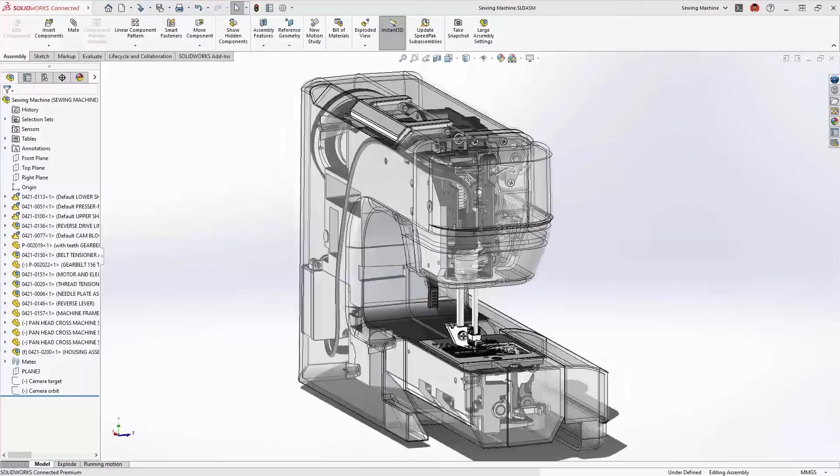Let's now look at what's new with the interface and user experience. As a SOLIDWORKS user, you expect the best out of your software when it comes to customization, performance, and working with others. SOLIDWORKS 2023 significantly improves the user experience.

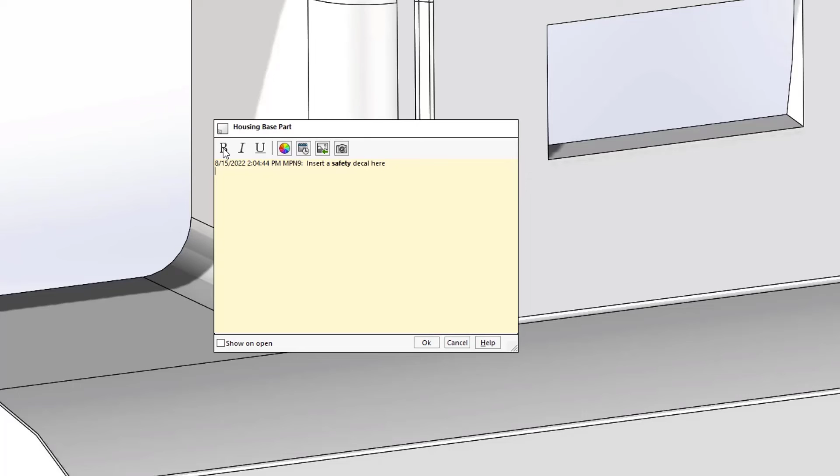Communicating with your team on a project is vital to success, and a great way to do this is through comments. In SOLIDWORKS 2023, comments are enhanced to improve usability. You can now emphasize text using the bold, italic, or underline modifiers. Adding a screenshot to the comment is just a click away.

You can add images from your local machine to give your comments even more context. The background color can be changed as well. These labels can, of course, be customized to add even more clarity if a comment is critical. You can set them to appear when the document is opened.

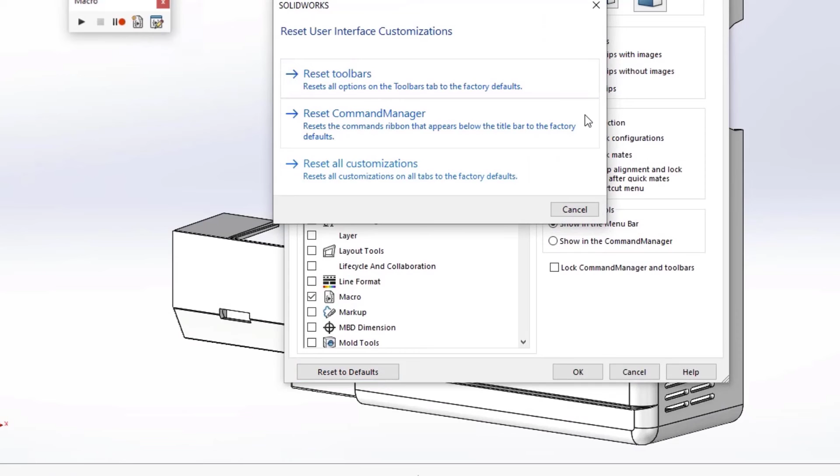It's no secret that SOLIDWORKS has the most customizable interface of any CAD application. Have you customized too much? Or maybe you want a fresh start? You can now more easily restore the default settings in SOLIDWORKS 2023. Each tab of the Customize window has a Reset to Default button that allows you to reset that specific settings, the command manager, or all customization.

And of course, we have to talk about performance. The render system, released in 2019 to improve frame rates during pan, zoom, and rotate, has been dramatically optimized. You'll now have greater reliability with the Enhanced Graphics Performance box checked, so that you can realize the faster frame rates when viewing large assemblies or parts with complex geometry.

A better user experience means improved productivity. Customizing the user interface, communicating effectively, and improving frame rates allow you and your team to speed designs.

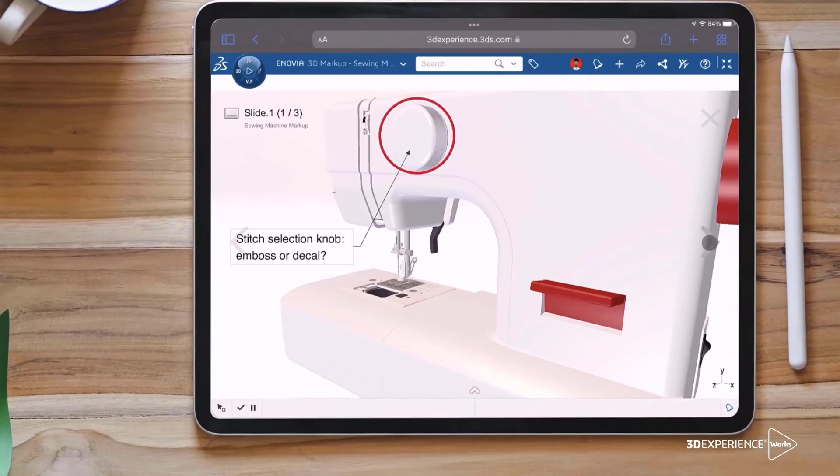Communicating with your team becomes even more effective when storing your data on the 3D Experience platform. All credentialed stakeholders have access to view content and can even make markups using any device with an internet connection. Those markups are stored with the data and shared directly so that the right person has access to the right data at the right time.

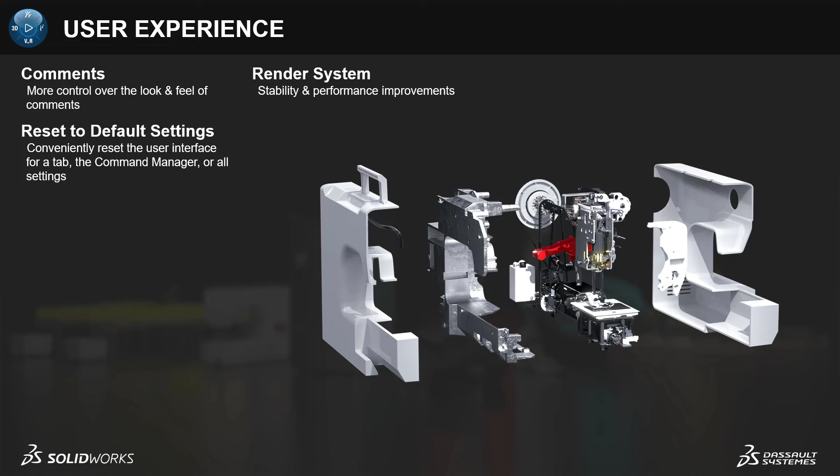Now, which of these user experience enhancements is your favorite? Mine is the faster graphics. Regardless who does what in SOLIDWORKS, faster graphics will always benefit everyone.